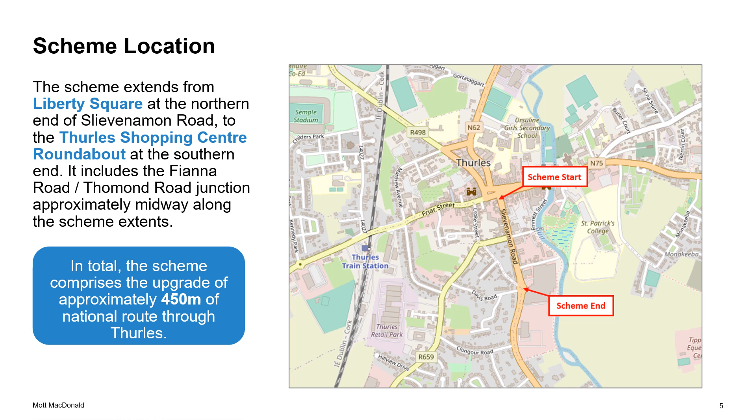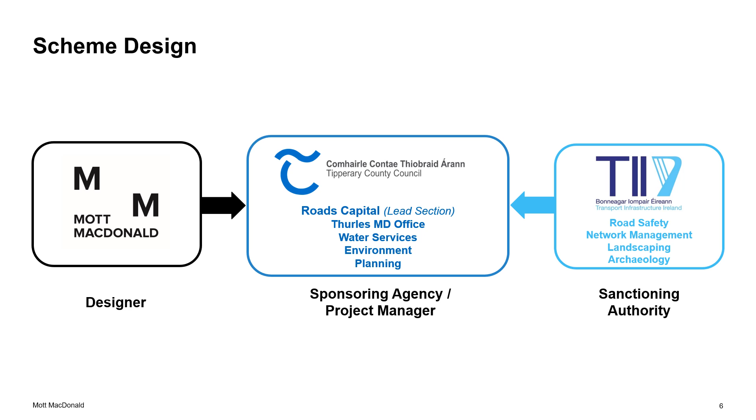The scheme design presented at planning stage has been developed in a collaborative environment, with Mott MacDonald Ireland engineering consultants acting as scheme designer. Tipperary County Council are acting as the sponsoring agency and project manager for the scheme, with TII acting as the sanctioning authority. Local knowledge from the Thurles Municipal District Office has been key to developing the proposed layout. TII have also provided important design inputs with respect to road safety, network management, landscaping and archaeology.

So why is the proposed development needed? Following several site visits and a thorough review of existing site survey information, a number of key issues were identified by the design team. The first category is road safety. Deficiencies with respect to road layout, signage and road markings have led to an increased risk of collisions between pedestrians and vehicles. The TII Road Safety Inspection Report from May 2018 recommended that this section of the N62 should be upgraded to improve safety and comfort for vulnerable road users and to reduce the severity and frequency of traffic collisions.

Furthermore, inadequate pedestrian infrastructure has been identified by the design team. A footway assessment found that 52% of the existing footways have less than the desirable width in accordance with current design standards. Pedestrian crossing demand assessments show that existing crossing provision does not meet current demand. And also, unauthorised parking on existing footways is causing obstructions to pedestrians and vulnerable road users and causing increased deterioration of footway surfacing.

The current pavement surface is also in poor condition. Visual inspection recorded a full range of defects present relating to the condition of the surface course and the integrity of the pavement structure. Further pavement condition surveys have confirmed the need to improve the pavement structure. The TII Pavement Asset Repair and Renewal Report from November 2018 recommended structural strengthening of the existing pavement to maintain the current road asset.

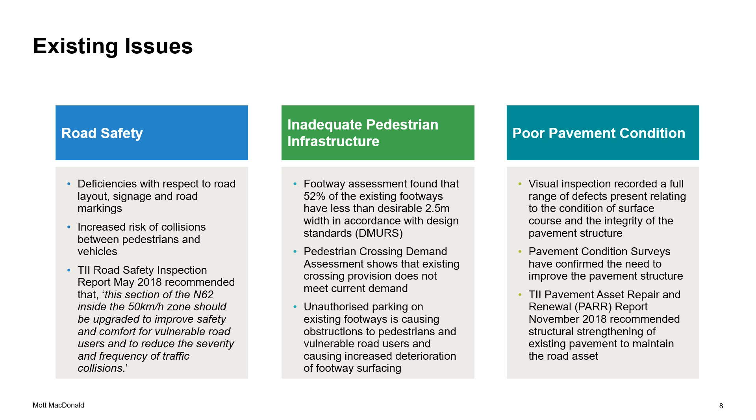The images presented here provide a snapshot of the issues identified on site by the design team. Image number 1 shows the wide road cross-section present along the street. This promotes higher traffic speeds and presents a difficult and unsafe environment for pedestrians crossing the road. Image number 2 highlights the poor pavement surface which is present along the street, with cracking, patching, uneven surfacing and material loss all identified by the design team.

Image number 3 clearly shows the poor condition of the existing footways and the unsafe pedestrian crossing infrastructure at junctions along the street. Image number 4 again shows the poor condition of the existing footways and the lack of definition in several areas, which leads to a greater risk of collisions between pedestrians and vehicles. Image number 5 shows the illegal parking which is common along the existing street due to the lack of formalised on-street parking spaces. This causes obstruction to vulnerable road users and causes damage to the footway surface. Image number 6 highlights the narrow footways which are present along sections of the street, which do not promote safe and comfortable walking journeys on Slievenamon Road.

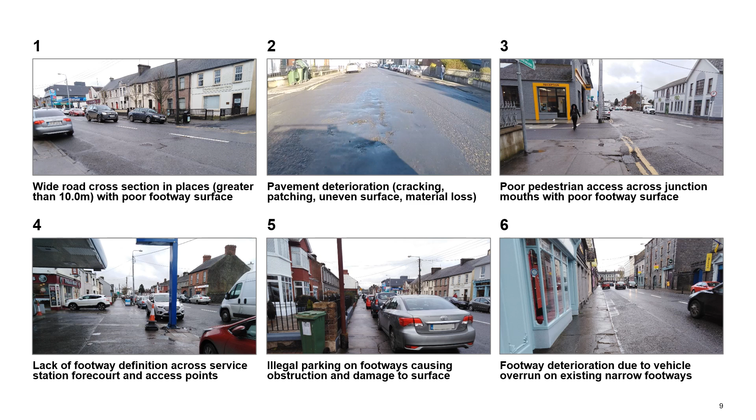It is important that the proposed development adopts the overall development principles, policies and objectives set out in the relevant sectoral and planning policy documents. It needs to support the National Planning Framework, National Strategic Outcomes for Compact Growth and Sustainable Mobility, and also support the strategic investment priorities for sustainable mobility as detailed in the National Development Plan.

It should align with the approach in the Regional, Spatial and Economic Strategy to facilitate compact growth to transition to sustainable and lower carbon forms of transport. It needs to support the policies and objectives of the County Development Plan and the Thurles and Environs Development Plan as they relate to sustainable transport, active travel, enhanced amenities and heritage, and reducing the impact of climate change.

Based on the issues identified by the design team, the scheme objectives were agreed with Tipperary County Council and TII. The design aims to: 1. Improve road safety by promoting reduced speeds along the N62 and maintain reduced speeds through the urban centre. 2. Enhance pedestrian infrastructure by providing a safe and comfortable route for pedestrians and vulnerable road users along footways in accordance with DMURS principles.

3. Improve pedestrian crossings by ensuring that all crossings are conspicuous with build-outs and removal of obstructions to improve visibility for motorists and vulnerable road users. 4. Improve public realm by creating an attractive environment and improved sense of place to promote walking journeys between commercial, social and educational facilities. And 5. Support national, regional and local policies by developing a scheme that supports planning and development objectives both within Thurles Town and at a regional and national level.

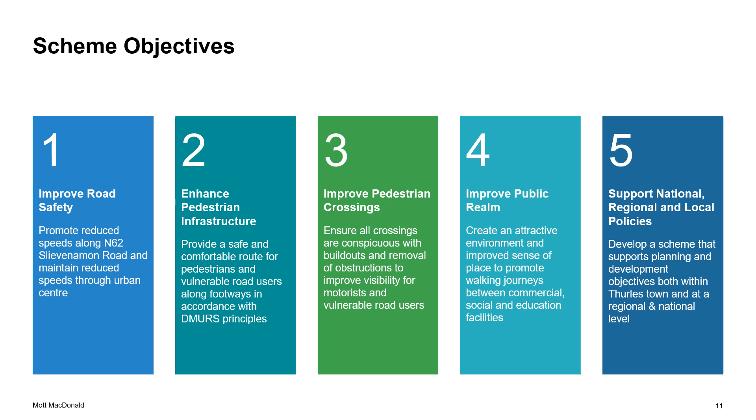The presentation will now examine the proposed development, moving from Liberty Square at the northern scheme extent, through Slievenamon Road and onto the Thurles Shopping Centre roundabout at the southern scheme extent. The road width is reduced to 6.5 metres to meet current design standards. This allows road space to be reallocated to improve footways, pedestrian crossings, and provide formalised parking spaces. New public lighting and street furniture will be provided together with new trees and soft landscaping.

A series of photomontages have been developed to assist the presentation of the scheme to stakeholders and the general public. The location of the first view is denoted as follows. The existing view at this location highlights some of the issues described earlier in the presentation, including the poor pavement surface, aged footway surface materials, and informal on-street parking. The condition of the existing public realm is worsened by overhead services which cause visual clutter, damaged street furniture, and a general lack of greenery.

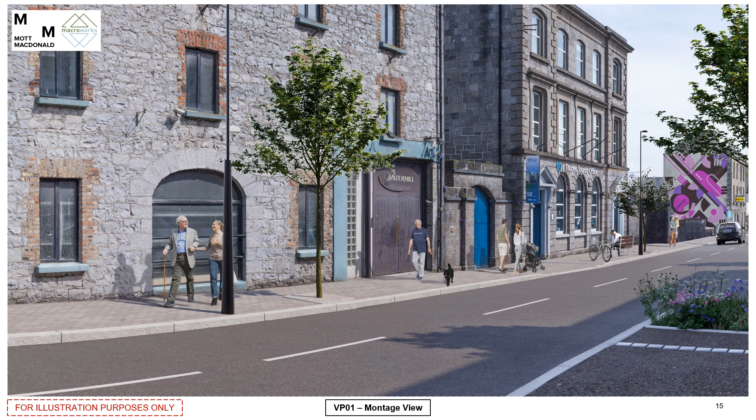The development aims to improve the street by providing a new pavement surface and increasing footway widths to include high-quality materials that complement the recent Liberty Square redevelopment. Overhead services will be diverted underground to reduce visual clutter, and high-quality street lighting will be provided. The public realm will be enhanced further by providing trees and planting to promote a sense of place and attract more pedestrian journeys to the street. The provision of trees and tree pits also provides a very practical improvement by adding capacity to the stormwater network and improving air quality.

Street furniture will include seating to encourage people to spend time in the area and provide resting points for the elderly. The strategic positioning of street furniture will also assist in reducing illegal parking on footpaths. Finally, the improved public realm has the potential to encourage further improvements by the local community, such as street art which has been successful in other similar urban centres.

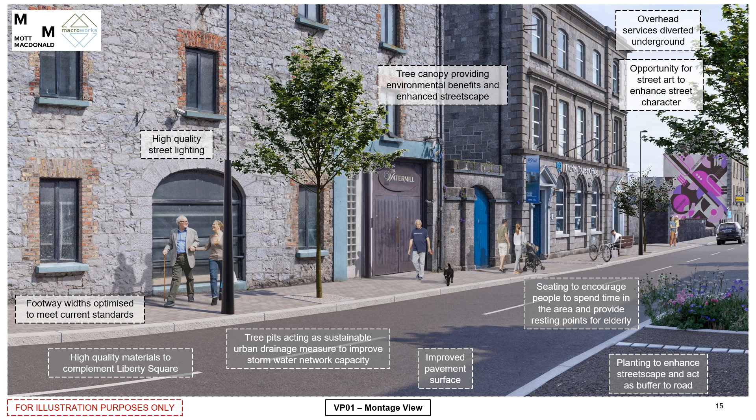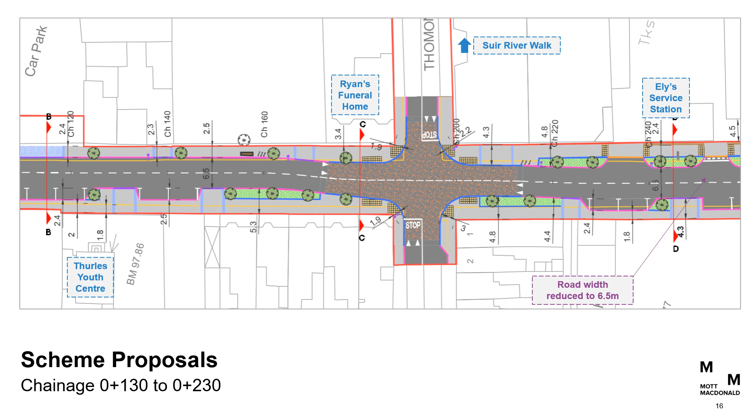Moving in a southerly direction, the approach of reducing the road width to 6.5 metres in order to reallocate road space is maintained. A new raised table configuration with a contrasting surface colour is proposed at the Thomond Road-Fianna Road junction, which will provide a safe crossing opportunity to pedestrians and improve visibility to oncoming traffic. Formalised parking is included outside of the junction sightlines. Footway widths and surfacing will be improved throughout, including at the entrance and exit of the service station. New public lighting and street furniture will be provided, together with new trees and soft landscaping. The second photomontage view is located here.

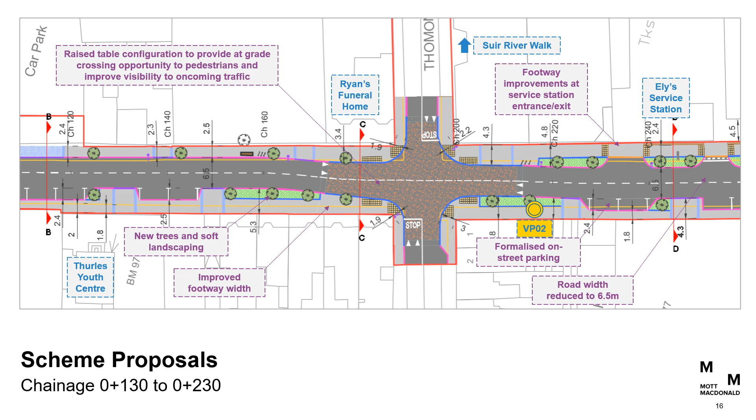The existing view of the Thomond Road and Fianna Road junction highlights the excessive road width, which encourages higher traffic speeds. Informal on-street parking obstructs junction sightlines and encroaches onto the carriageway. Poor surface water drainage measures and aged footway surface materials are also noted. Poor pedestrian facilities at the junction increase the risk of collisions with vehicles.

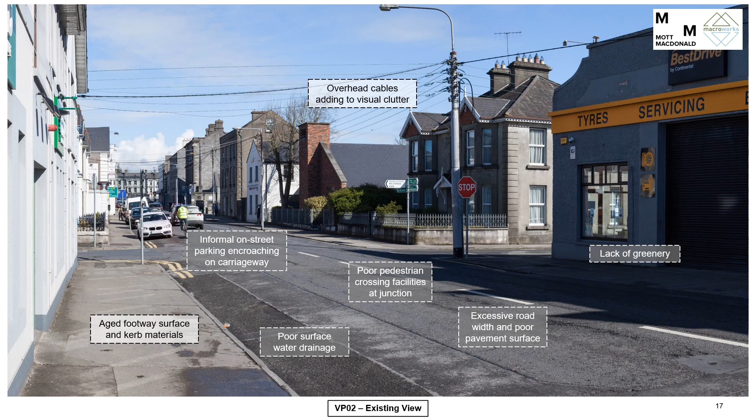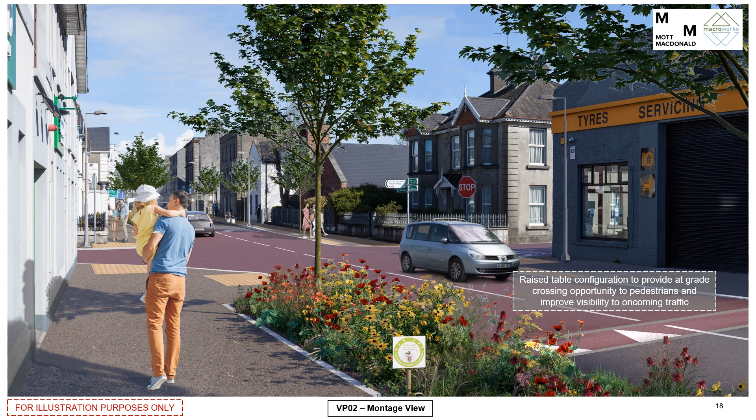Similar to the previous view, the condition of the existing public realm is poor, with overhead services adding to visual clutter and a general lack of greenery noted. The provision of a new raised table configuration will provide a safe crossing opportunity to pedestrians and improve visibility to oncoming traffic. The reallocation of road space will allow footway widths to be increased to meet current design standards.

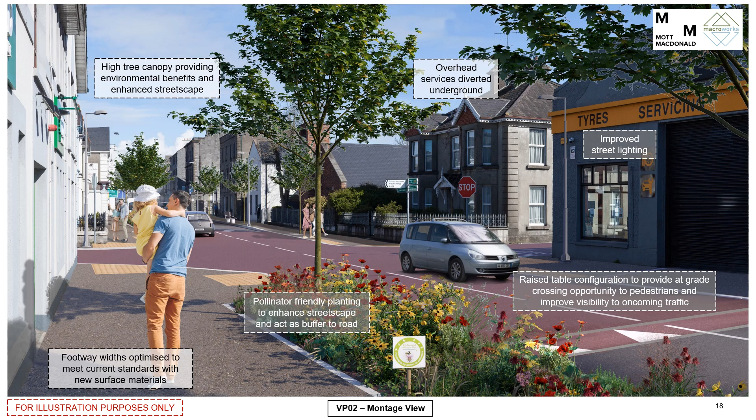The public realm will be further improved by diverting overhead services, providing improved street lighting, and by providing trees and pollinator-friendly planting, which offer practical, environmental and drainage benefits as discussed previously. Continuing in a southerly direction, the new road width of 6.5 metres has been applied. Footway widths and surfacing will be improved throughout, including at the entrance and exit of the service station and across Kavanagh Place.

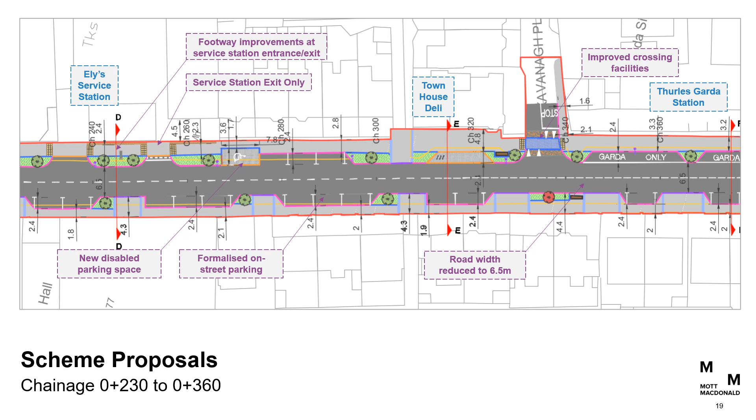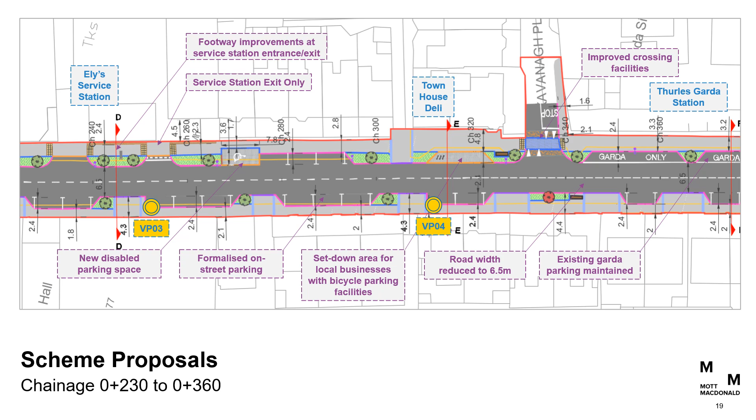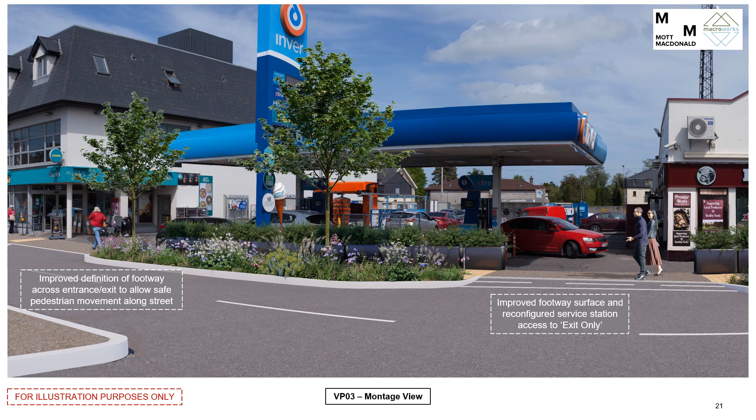The development aims to provide a safe, continuous footway across the service station, which reduces the risk of collisions for vulnerable road users. To achieve the scheme objective, it is proposed to reconfigure the southern service station access to exit only. A series of raised planters provide separation between pedestrians and vehicles adjacent to the forecourt. New formalised on-street parking and an improved pavement surface is also proposed, along with trees and pollinator-friendly planting to improve the public realm.

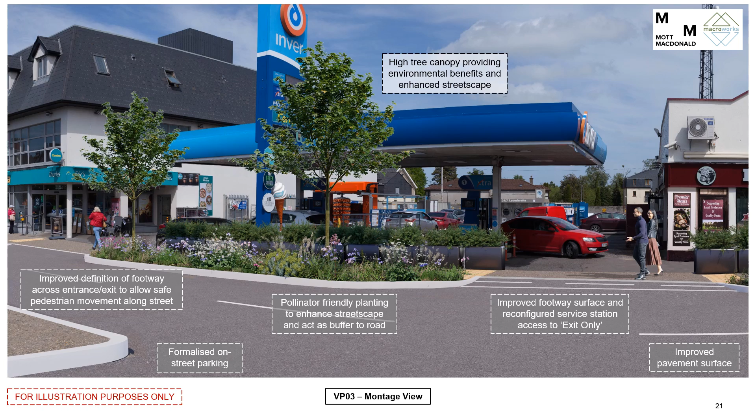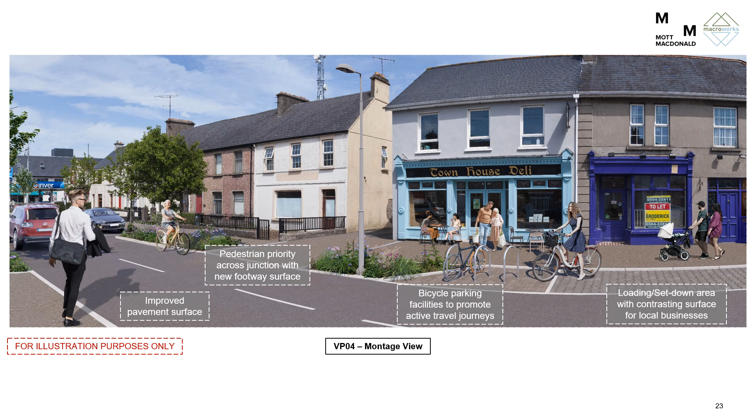The reconfigured road layout will include an improved pavement surface with a formalised loading and set-down area identified with a contrasting surface to highlight its function. The development will include new street lighting and formalised on-street parking. It will encourage a revitalised public space for commercial activities on the street, which will now form an attractive link between Liberty Square and Thurles Shopping Centre.

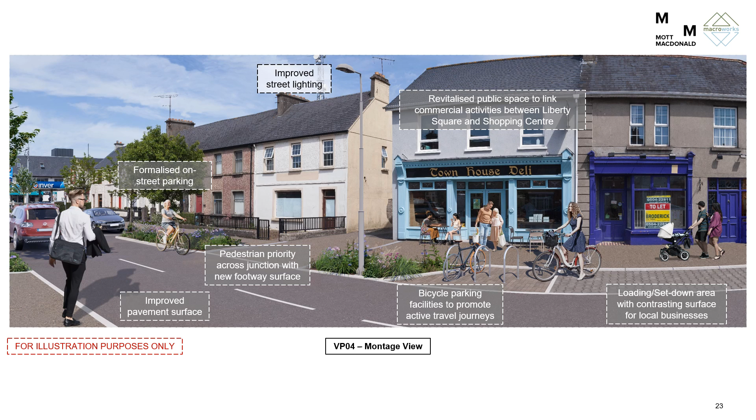The final section of the scheme includes upgrades to pedestrian facilities across Kavanagh Place and a new uncontrolled crossing at the roundabout, which will link residential and commercial areas. The reduced road width of 6.5 metres will allow footway widths to be increased while maintaining existing Garda-only parking in the area. New landscaping will be provided, identifying the area as a natural gateway to Thurles from the south.

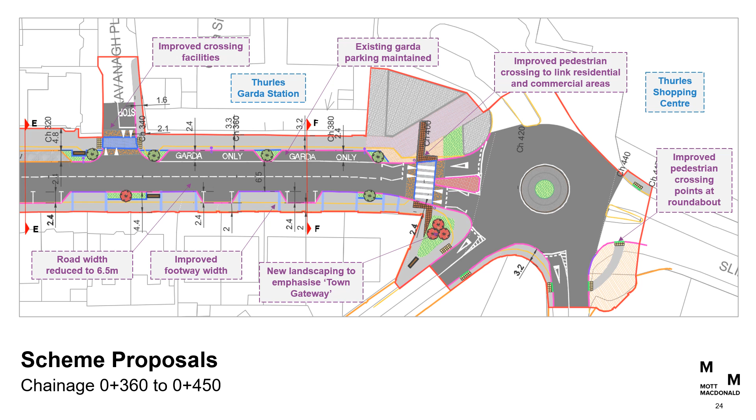The Part 8 planning application was submitted on the 28th of July 2022. The drawings and documentation will be available for public viewing at Tipperary County Council offices in Thurles, Clonmel and Nenagh for a period of 4 weeks from the date of the planning application. Submissions can be made for a period of 6 weeks from the date of the planning application. A public information session is scheduled to take place on Tuesday the 2nd of August at the Thurles Municipal District Office. All are welcome to attend.